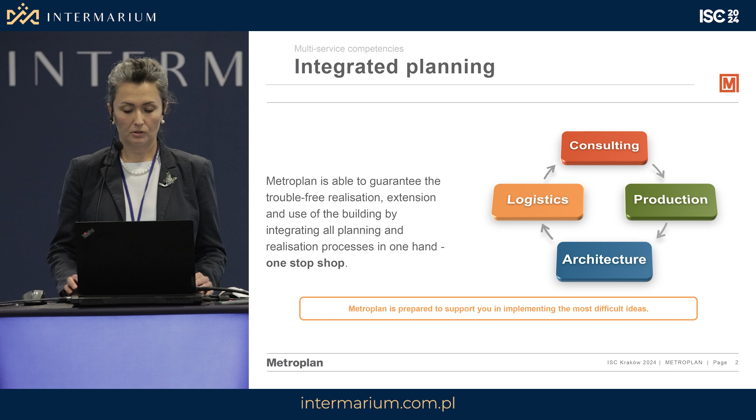But what I'm going to talk to you today about is specifically the Rossmann project. In terms of a brief agenda, first I'll say a couple of words about the background of the project. Then we'll focus on the process and its challenges, the alignment of the simulation model with the needs of organizations, so how we actually had to tailor our works and our approach to make sure that we fit with the expectations of the organization itself. Key decisions which impacted our final product, and then we'll go over the installation mapping.

Maybe not in a very traditional way, because I understand that some of the presentations today were very technical and very detailed actually by the modelers themselves. What I will do today as a project director, not actually personally modeling the solution, is talk about how we've led to the final product, what we focused on, how we could have recognized customers' needs, and how it affected the end goal.

And I will also talk to you about some key benefits of the model itself, and I will actually speak about real-life benefits. So something I already know, I have feedback from Rossmann that these are the 5 examples where they managed to use the simulation model already in the organization. Obviously, this is not the end. It's just a few examples which, as I said, I've been made familiar with by now.

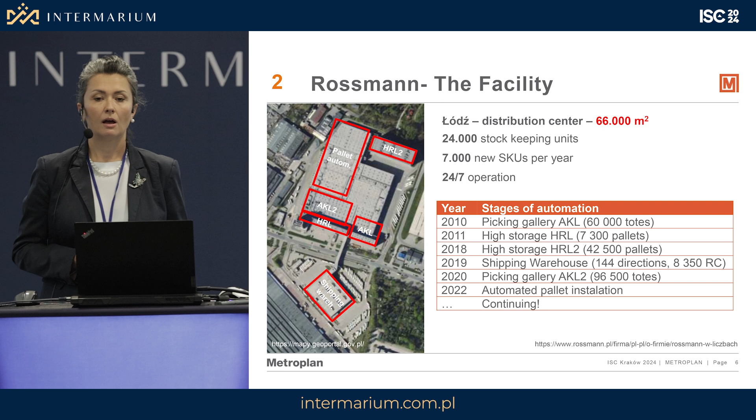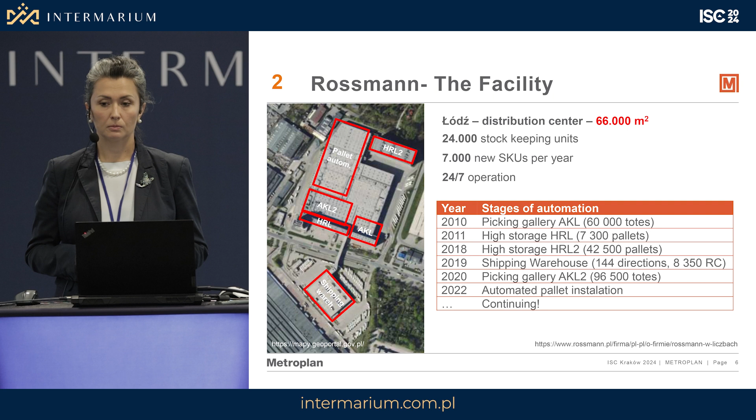So you can see the amount of installations, the capacity of the installations themselves, and in order to gain this global perspective and enable any type of optimizations, what-if analysis, Rossmann as an organization couldn't rely just on the knowledge of individuals who are very specified in their field of expertise, who have huge knowledge, yet they only usually focus on a certain part of the installation itself, not looking at the entire installation holistically. So the main goal from Rossmann's point of view is making sure that we can allow for this global perspective and recognize possible optimizations and changes into the already existing installations.

Just to look at the components of the installation and how we introduce them in the model itself. As you know from previous slides, we have 5 main installations, but actually the way we worked with FlexSim, we divided it into 8 components. The first 2 are high bay warehouses. Both of those have their own monorail automated trolley systems. Then we have the 2 mini loads, one of the smaller capacity and one of the larger ones, which are called in short AKL1 and AKL2, where we have manual picking and pallet to container repacking activities.

Then we have the automated shuttle system for storing and sorting shipping containers, roll container formation installation, also known as PNG, which is short for a process that was the source of the name. In Polish, it means 'paper on top.'

This is where we have application of lightweight products on top of the already assembled roll containers.

Then we have number 7, which is the automatic warehouse for shipping units, managing roll containers and dollies. This is nothing else than an automated dollitizer, which prepares stacks of dollies ready to be shipped to stores.

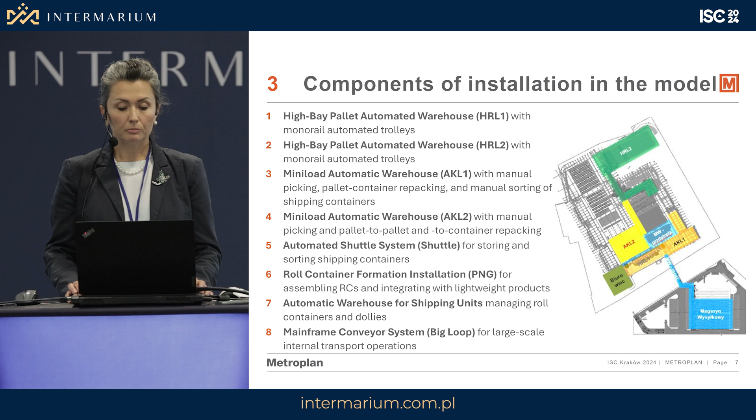Now I will move on to the process and its challenges. What we can see here is comprehensive warehouse process characteristics - receipt, repacking, storage, and so on. You would say that's fairly standard.

But what we have to consider here is the scale of the operations - not only the scale of the operation itself, but also the variety of different systems we're working with.

We start with the receipt of palletized materials and progress through various stages, storing the materials in pallet racks, specifically the manual type, which wasn't part of our simulation model. However, also in the high-bay warehouse, this is where we have an automated solution, then repacking materials into reserve containers and storing them in reserve picking galleries.

The process continues with the execution of pick and pass orders in the two independent picking galleries. So we have automated installations, whereas the picking activities are pick-by-light, so manual processes also. These containers then get sorted and filled with bulk materials.

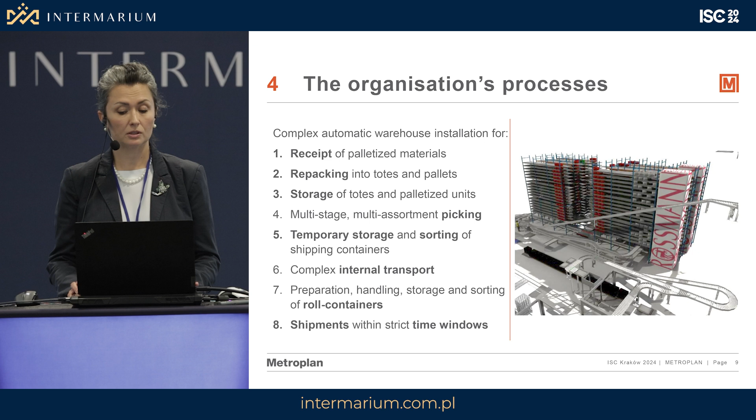Along the way we also have the repacking area, where products are sorted, filled with bulk materials, buffered, and made ready for dispatch. The complexity here is vast because of the sheer size of the installations, and of probably the highest priority is the interdependencies between the installations and the numerous steps required to successfully complete a process.

From the processes themselves, we've identified a few challenges. The basis for our approach was the multi-stage nature of the process, and especially the predetermined time windows - the system was meticulously designed to operate with narrowly defined shipping time windows.

We have very tight operational margins, and something that cannot be ignored is the complex management of the system - the entire warehouse management system, including the material flow computer and the integration of essentially 5 separate installations by 5 different suppliers. That alone is a huge process.

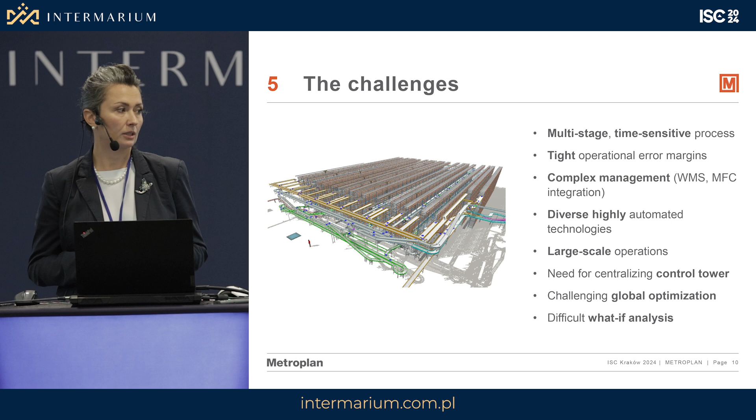In terms of the decision, considering all the factors mentioned on the previous slide, this ultimately led Rossmann to collaborate with Metroplan Poland in developing the simulation model. As already mentioned, we've always encouraged Rossmann from the very early conversations back in 2020 to only consider working with FlexSim software. We thought it's the best forward-thinking simulation standard we can offer a company.

As much as we've also worked on different development type projects, in this case, with the scale and complexity of the operations, we've recognized this is a completely different and intriguing dimension to us, and the project itself has been tremendously rewarding. Hopefully it's not one of our last ones of this scale.

Now I'll move on to the actual alignment of the simulation model with the needs of the organization. So what I would like to focus on here is the project work plan. Essentially, we've divided the project into 4 phases: phase A, B, C, and D.

Phase A can also be called the initial phase, because the first and most important step from our point of view, which was crucial to determine how we're going to work with Rossmann and with the modeling activities, was the needs analysis of Rossmann, the requirements of the organization, and the technical capabilities of FlexSim, to make sure we have a tying point between the technical aspects, the operational aspects, and also what you as an organization are going to do with the model.

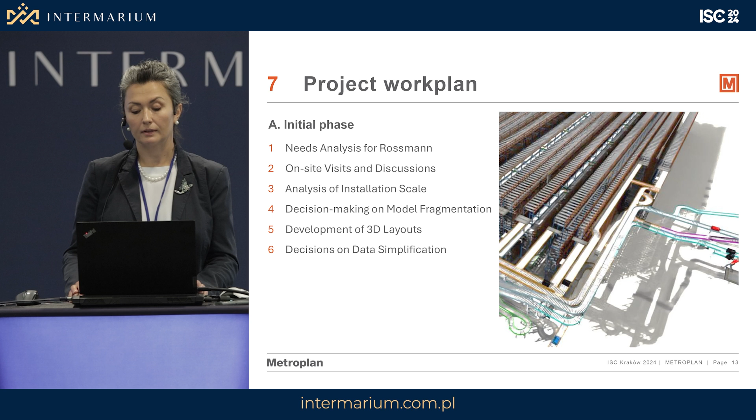And then the final point was, as already mentioned, the decision to simplify the data according to the model parameters established previously. From the initial phase, from phase A, we moved on to phase B. And if you think that phase A sounded intense, I can assure you that phase B is even more intense. Because if you look at the first few points where we've got the mapping activities - whether it's process structures, transportation, material flows, or process - these are the sort of activities which at some point actually forced us to go a few steps back before we can move forward.

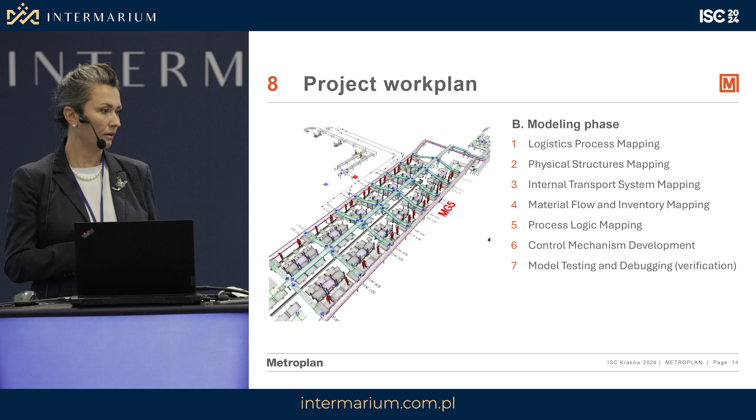It was very much something that we tried to achieve agreement on the processes specifically, because what you must remember is that we relied on individuals' knowledge. There wasn't a book where we could just take processes from a script or internal procedures and move it into FlexSim. It's something that we had to interview almost. And as you can imagine, if you speak to different individuals, believe it or not, they had different approaches to different processes.

Very often we ended up in hourly discussions about one specific decision point. One would say it goes left, the other would say it goes right. Where does it actually go? So this is where we thought we implemented something based on knowledge handed over to us by a specific individual, whereas at the next meeting, next workshop, we found out this was wrong and had to redo it.

So there were a few instances like this, but actually the positive outcome is that for Rossmann as an organization, it allowed the creation of a process logic map, something they didn't have before. So there's an added benefit, a win-win you could say, in developing an integrated process map - essential for us, and highly beneficial to Rossmann, giving them the chance to review their own processes. It also promoted internal discussions, so there were other human aspects and softer aspects to the process along the way.

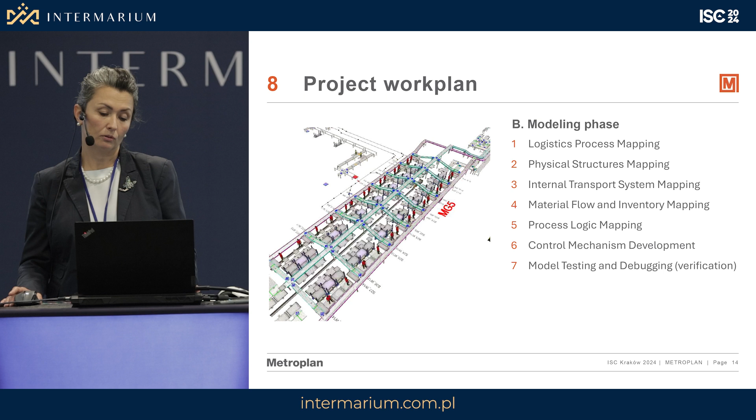During the control mechanism development, we focused on what can and cannot be delivered in terms of the capabilities and a graphical user interface to control the model. Point number 7 purely focuses on the model testing, debugging and verification with the team on site.

For the two final phases, the application phase and go-live phase, the challenge was mainly configuring the GUI to process and utilize real data which was already pre-processed - so we worked on something that was already given to us. This is where we also tested the first what-if analysis successfully. And in terms of visualization, we focused on real-time tracking and identification of bottlenecks already at this stage.

Because we'd done so much in terms of analysis of the data, workshops, meetings and clarifications, the go-live phase was actually just a formality - our main focus was on the human aspect, on empowering the Rossmann team to work with the tool, making sure they're trained to the correct level so they can fully manage what they've received as a tool.

We also developed training manuals as to how to use this specific simulation. I know for a fact they had some training with InterMarium in the meantime. There was a designated team from Rossmann, and I know that since 2020, since the original project, the team has definitely grown.

As I said, it's currently working - it's a live tool, and it's very comprehensive. Thanks to the training and operating manual we produced, it's also possible for them to pass the knowledge on. So there's a key user who's now responsible for making sure that if any new designated staff members need to familiarize themselves with the model, it's there to be had, it's there to be analyzed.

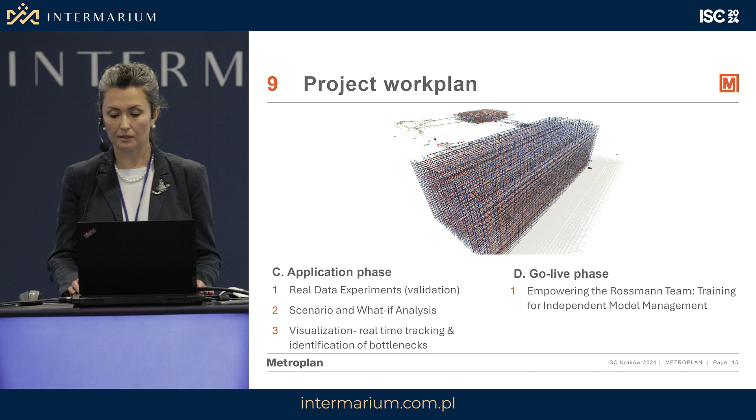In terms of the key decisions regarding the model, as I already mentioned, one of the key decisions was actually the model fragmentation - we decided to go ahead with three smaller submodels.

One of the challenges which had to be considered and couldn't be ignored was the equipment - the office computers already available at Rossmann. Probably no organization, maybe it's not that they're not ready, but they perhaps don't necessarily want to immediately invest in a huge overhaul of available equipment. Therefore, we had to take into account what capacities and capabilities they currently have and whether the models could actually be utilized with this equipment.

The strategic partitioning maintained the model's desired level of detail, while we also managed to ensure computational manageability for the computers themselves. The three models were actually planned and grouped according to the fundamental functional dependencies and material flows in the organization.

As you can see, in the top left-hand corner we've got the AKL2 with the high bay warehouse, the large high bay warehouse and a large loop. Then at the bottom we have the repacking area, another picking gallery, and the smaller high bay warehouse. The final third model is the shuttle with the PNG installation and the dispatch warehouse.

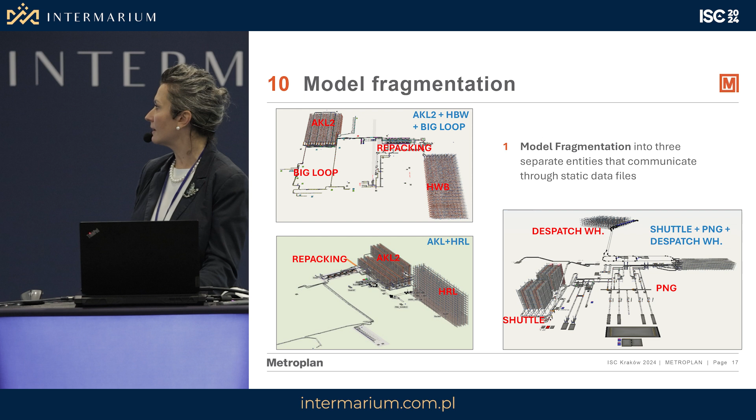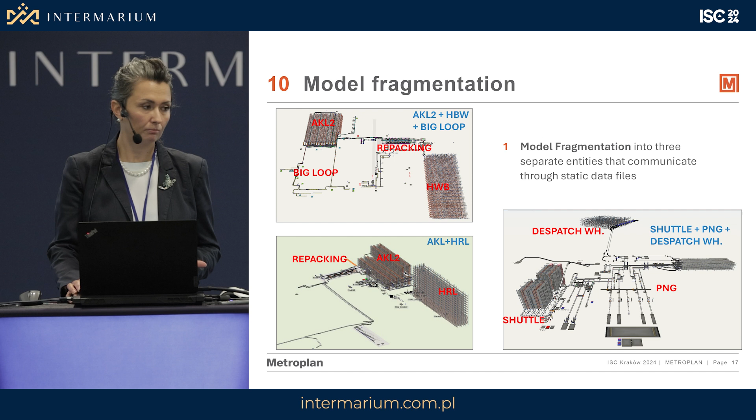This was the level of fragmentation, something discussed again with Rossmann. We had full support from them. We ensured there's sufficient communication between the models, exchange tables and so on, so we knew there is connection between the three models, and it's highly operational from their perspective also.

In terms of further decisions made along the way, we agreed that the accuracy of representation will be the depiction at the basic material group level. Of course, we can have different approaches depending on what we're trying to create. For very early preliminary conceptual work, the level of detail isn't going to be so high. For an installation that's already operational, we have to make sure we try to depict what's already there.

So what we ended up with is we went with material groups in individual installations with the granularity of one pallet and one tote, which then gave the team the flexibility to generate system loads.

The system was scheduled to be tested over a 24-hour period to mirror the actual operational pattern of the center itself. And the GUI, model management, parameterization tables, and dashboards with key results were also agreed and approved based on the expectations from Rossmann.

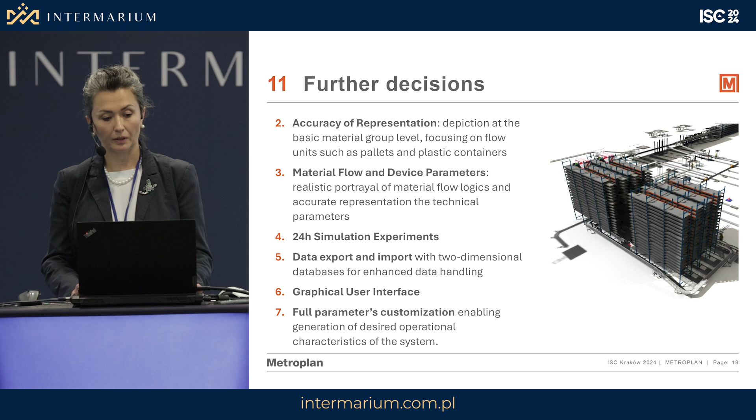In terms of the key expectations, what we should look at towards the handover of the ready tool is: have we actually fulfilled the key expectations of Rossmann? Originally we had those expectations grouped into three. Later on I also decided to add a fourth point, which is continuous improvement.

As much as the first three aspects focus more on the hard factors, either financial analysis, profit and loss, or various what-if analysis, the fourth one, continuous improvement, focuses around the softer skills. In terms of design and process, we had three main points to fulfill.

First was the preparation of data for future investment based on the data already available in the model. So what can we plan? How can we plan based on what we already have, and which direction should we be going? Then we had the checking of loads of key installation elements, essentially testing and evaluating technical solutions, both existing and potential future solutions once these have been identified.

In terms of optimizations, we obviously look at the number one priority of optimization. The first step is always identifying bottlenecks, then testing potential optimization solutions, as well as individual element loads. As you can see, these cross over from design to optimizations and even into the management part.

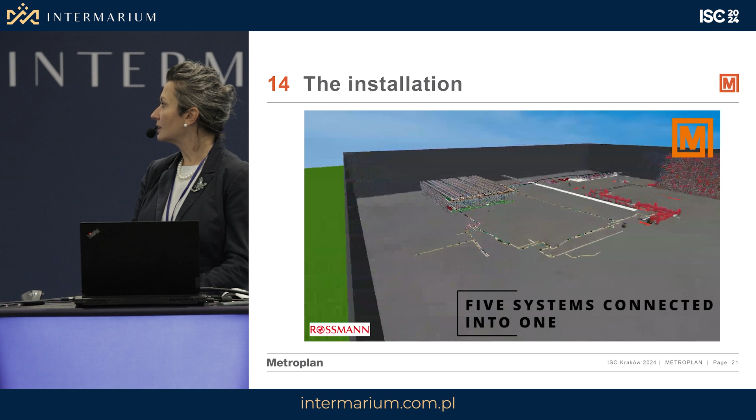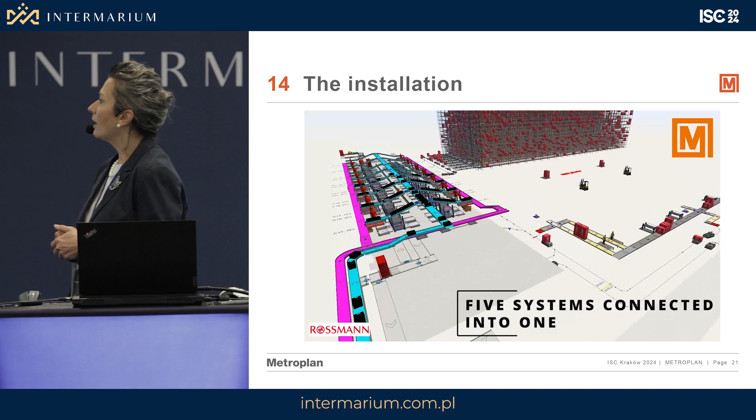As for the installation mapping and key benefits of the digital shadow, right now you'll be able to see what we call a flight over the installation. As you can see, we've got 5 systems connected into one. This gives you the scale of the project, whereas mainly looking at simply the blocks, which you could see from the bird's eye view from the first few slides, this is where you're actually looking.

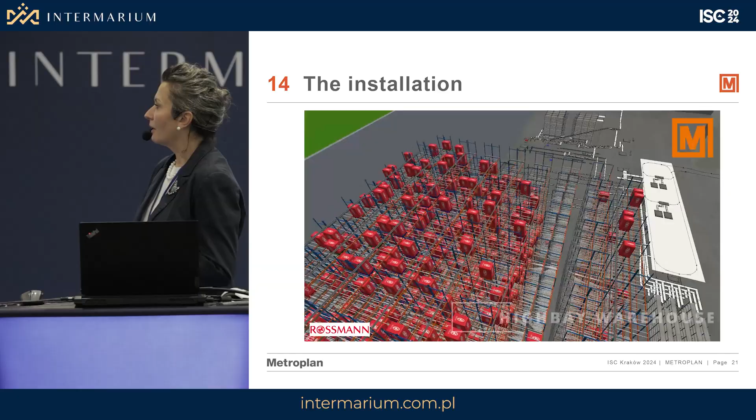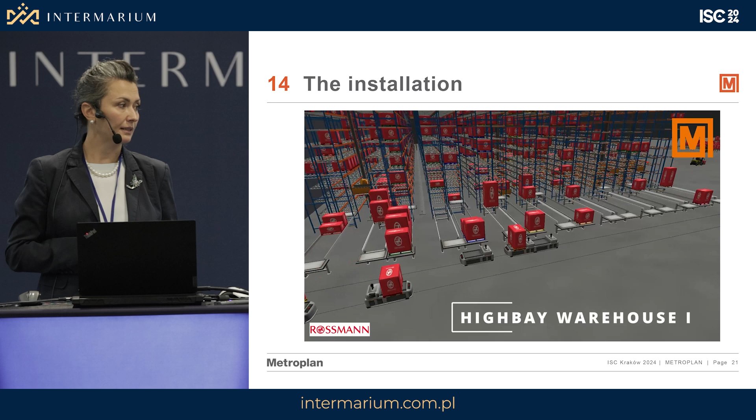This is, for example, the picking gallery—before you've seen the repacking area. This gives you the scale of what we're dealing with. And I think whilst you're looking at the movie, what I'll try to give you is a breakdown of what I mentioned at the beginning, which is the key benefits for the organization that have already been carried out.

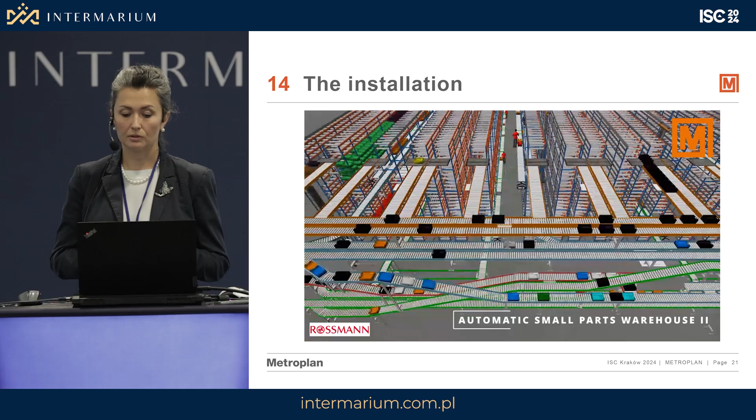So again, going back a few slides, I spoke about the expectations, and they were to do with design, with process, with optimizations, and with continuous improvement. So I'll have a couple of examples for both.

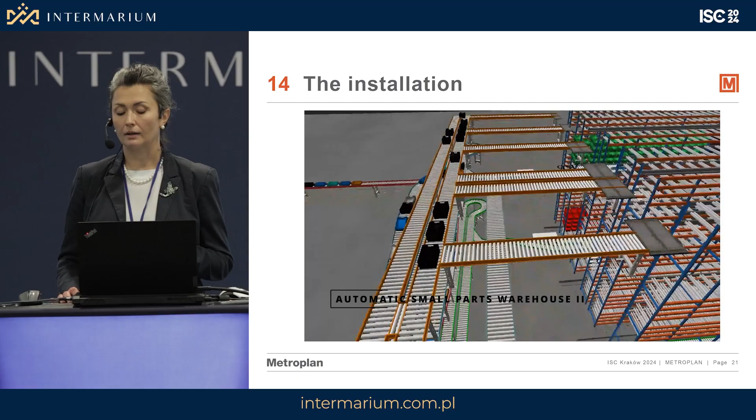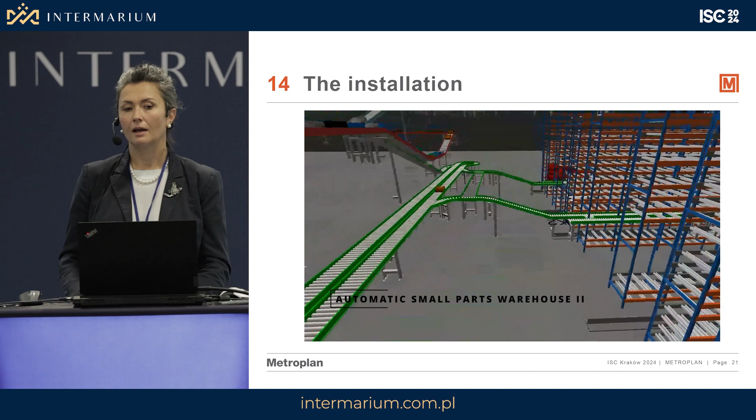In terms of design, as soon as the simulation was handed over, the team decided to carry out a simulation of the newly delivered mini-load installation in Łódź, doing it before the go live. This is important, because just by simulating it—even though it was a new installation, planned, checked by the supplier, also simulated for results by the supplier—they already managed to find some optimizations of the system at this stage.

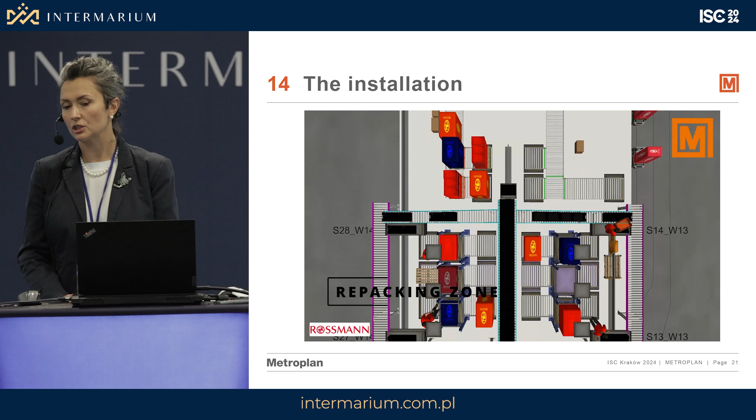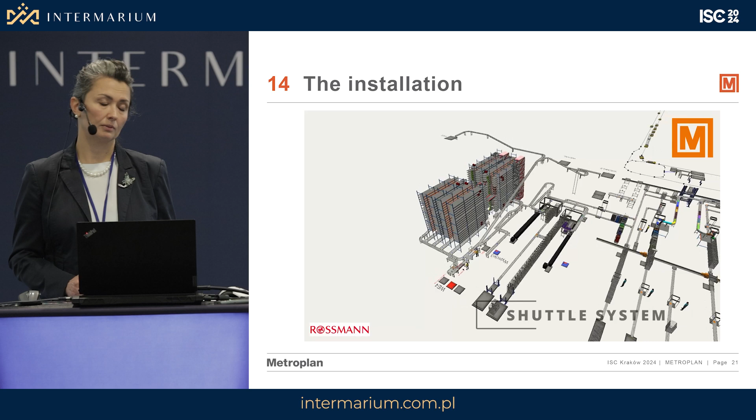Where it is important, because you could think they can do it anytime, right? They could, but what you have to bear in mind is where we have 24/7 operation, where we have such huge capacities to fulfill, any stoppages and trial and error of the working installation is a no-go. You want to be sure that what you're doing once you decide to stop the installation is actually going to work, or at least has at least 90% chances of being successful.

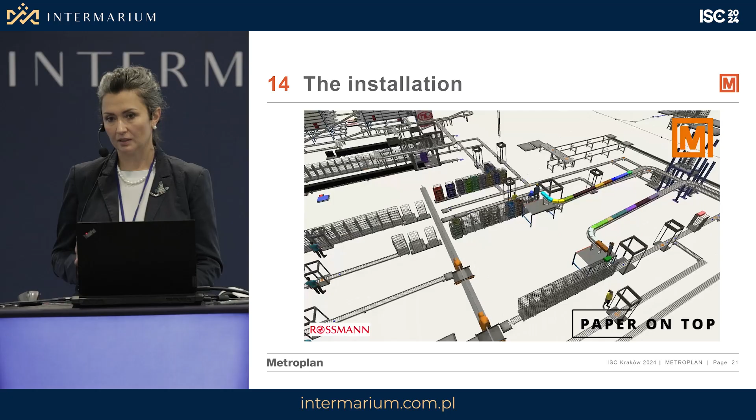So this is where they already found some optimizations—the go live was based on the improved processes rather than the designed processes. The second example here is the simulation of a new process for picking of bulky items, in order to assess the correct development path of a new installation.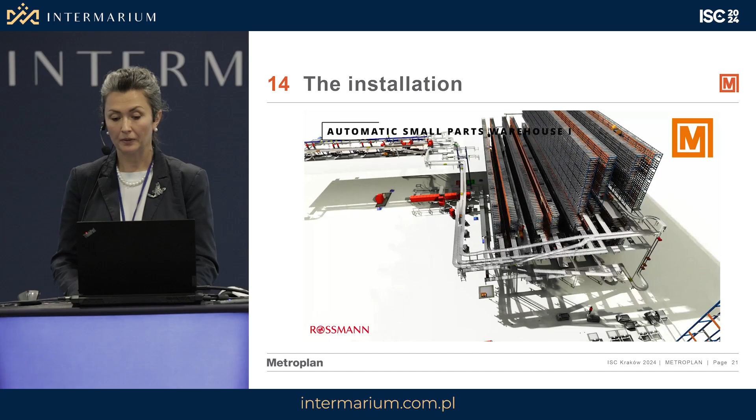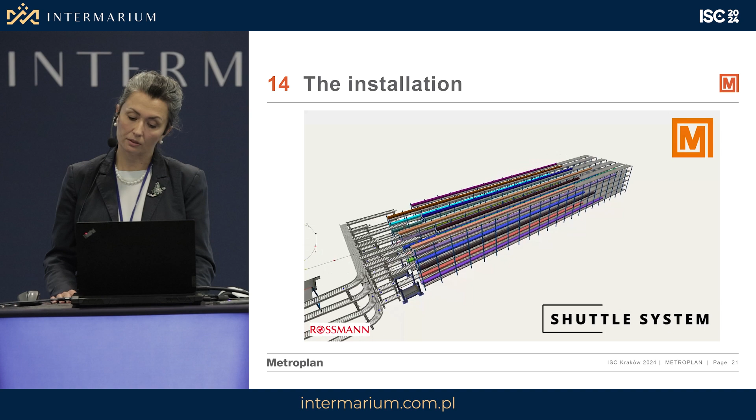In terms of process, there's also one example where Rossmann managed to carry out analysis of the efficiency of key elements of existing installations, using the shuttle, before deciding to expand the mini-load. Again, it's something they wouldn't have been able to do without the simulation model itself.

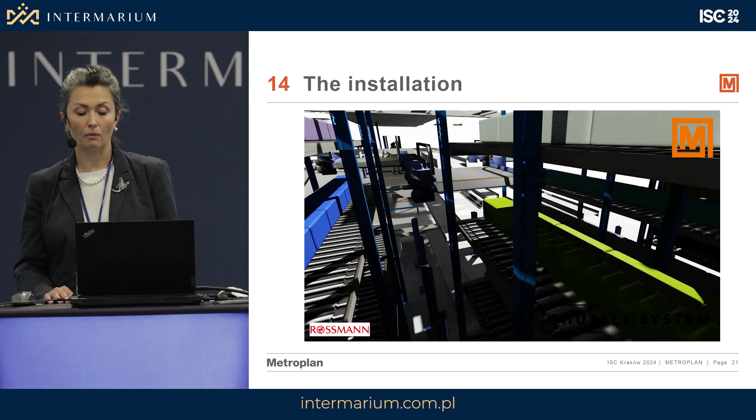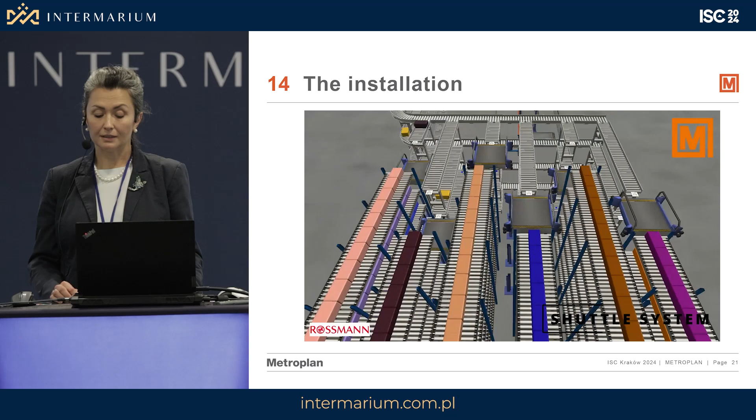As for the optimization aspect, there was also a couple of points, one of them being the shortening of the travel time of the stacker cranes in the high bay warehouse. It's a significant number, from my point of view, because we're talking about 13%. This has been purely achieved by changing the waiting time for the next handling unit for the stacker crane. So it sounds like a very simple process.

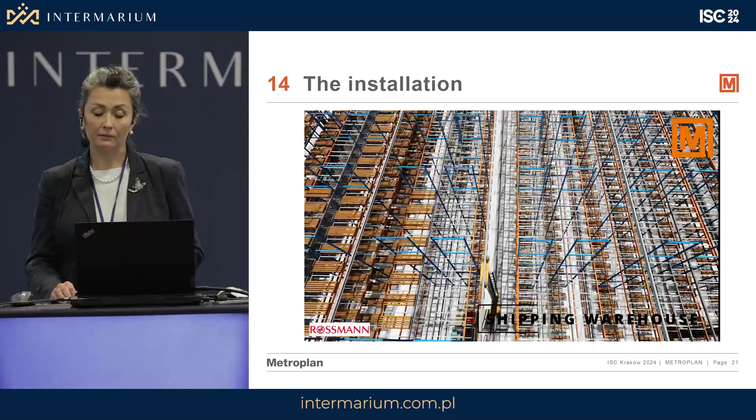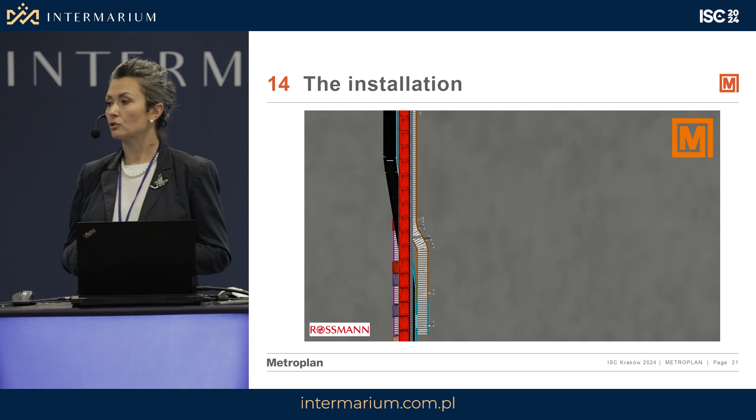But again, if we did that in a live environment, first of all, we would have had to think about and look at the stoppages of the system or potential delays of the fulfillment of the process. And the final one I wanted to talk about is the improvement of the flow of totes by picking optimal waiting time at the handover point. Again, a process very much focused on trial and error, but trial and error in the simulation model rather than in the live installation on site.

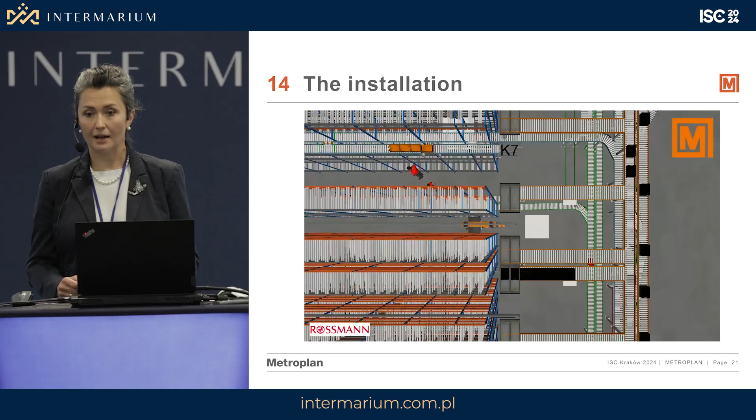So I think this gives an answer to the question, why is it necessary? Well, there are actual examples from real life, from the operations. There are, of course, lots of different activities happening on a daily basis. The simulation is being used by different departments—there's logistics, there's planning, there's dispatch.

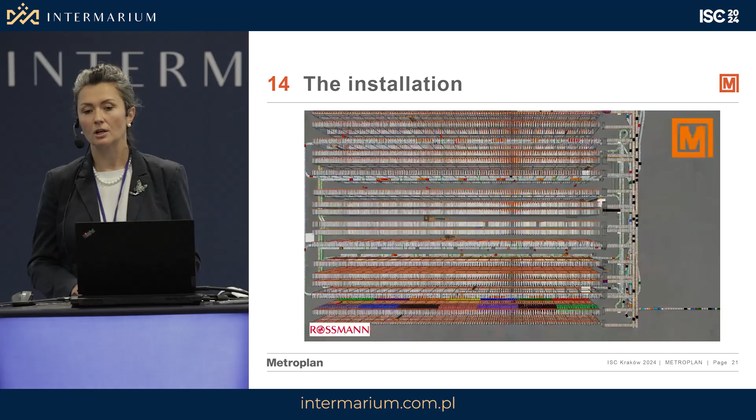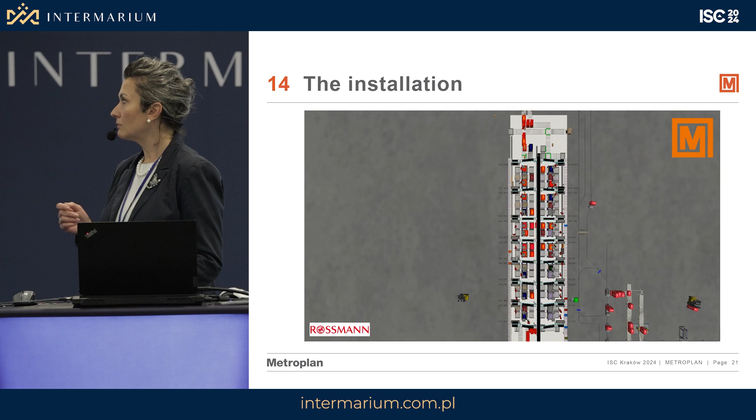Even maintenance teams use the simulation model to identify potential problems and where they need to focus certain efforts. The model itself can be viewed at our booth in the foyer, so I strongly encourage you to take a visual tour and maybe focus on specific elements if you wish. My colleagues and I will be there, happy to present it to you. As for today, from my side, that is everything.